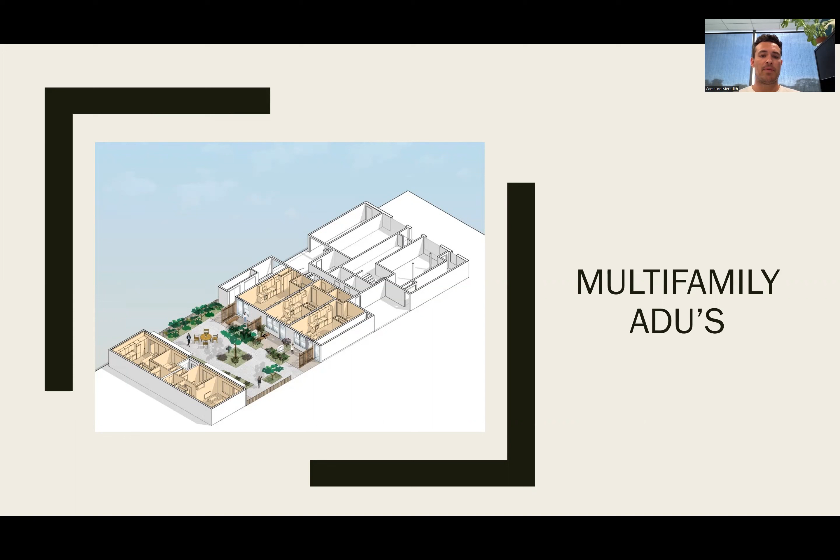Been getting a lot of requests lately about multifamily ADUs specifically, so I wanted to put a brief presentation together covering the main topics. Right now we're doing four multifamily projects: a couple are garage conversions, shown here in the slide, and the other two are freestanding ADUs we're building from scratch. We'll cover the main rules with multifamily, so let's get started.

Some of the 2020 state law changes specific to multifamily: there's no minimum lot size requirement, no floor area ratio requirement, multiple ADUs can be built on multifamily properties, limited parking requirements, and cities cannot override major state law changes, which is huge.

You can build up to 800 square feet each for freestanding units. Some cities allow 1,200, for example Long Beach. There's also the possibility to stack - rules may let you build two freestanding ADUs, and some cities will let you stack one on top of the other. Always check with your local city, because rules vary between cities.

The other method is you can build up to 25% of the existing unit count out of non-livable space. For example, if you have 4 units, you can build one ADU out of a garage, storage, or similar space. If you have 8 units, you can convert 2 ADUs out of that space. So 25% of the existing count - imagine a 100 unit building with extra garage space; you could potentially do up to 25 units out of non-livable space, if the property allows. There's a huge opportunity for that with multifamily.

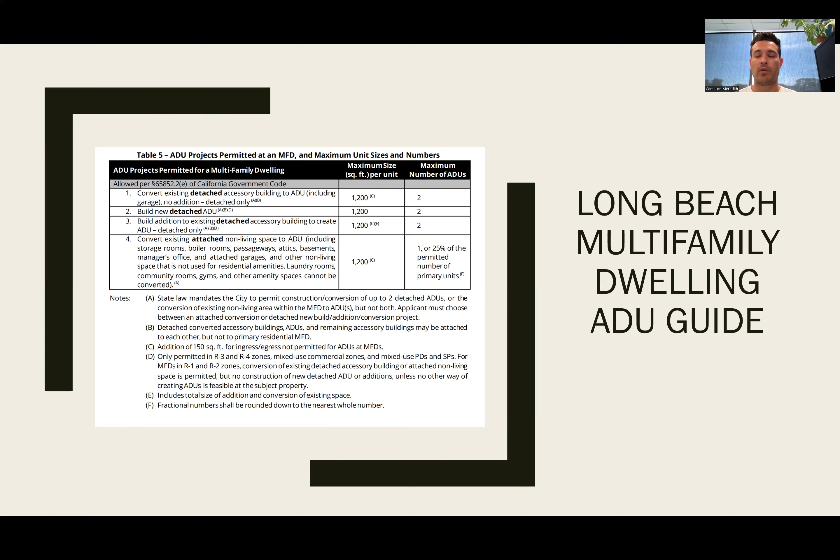But what they're saying is R3 and R4 has different rules than R1 and R2. So on an R2, they're going to make you go inside of non-livable space before they're going to let you build from the ground up. But that's only if there's no other option to do so. So very important to know that specifically about Long Beach. Again, always check with your local city of whatever city you're trying to build in.

Here's a Long Beach ADU guide continued. Again, this is specifically for multifamily. So you can see the setbacks for your side and rear. I'm not going to go through all of them since it would take a while, but this is pretty standard. Most setbacks are 4 feet from your side and rear and 10 feet from your existing structure. Some cities have moved that down to 6 feet from your existing structure.

But again, this is just to show you as a reference. Front yard, very important. Most don't let you do the front yard. You can kind of look at the rules here and what that consists of, but it's very rare that they let you go in the front unless there is enough space. And then height limits, you can see your height limits here.

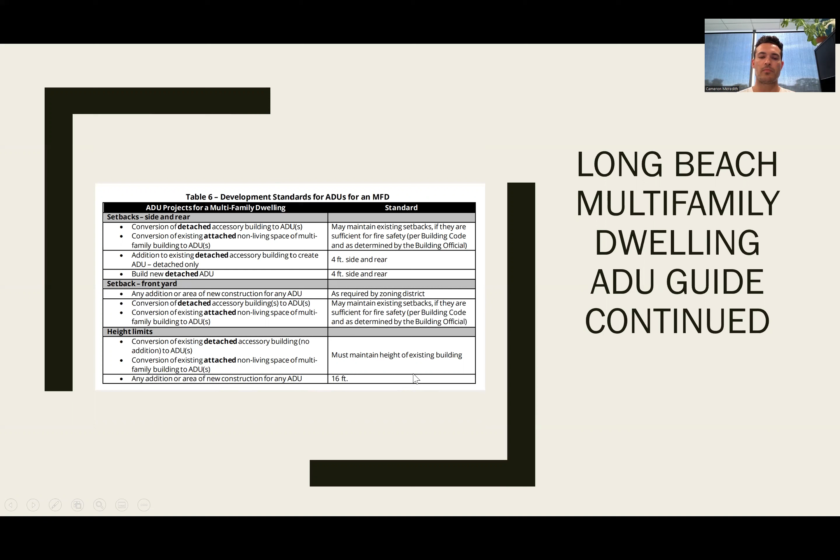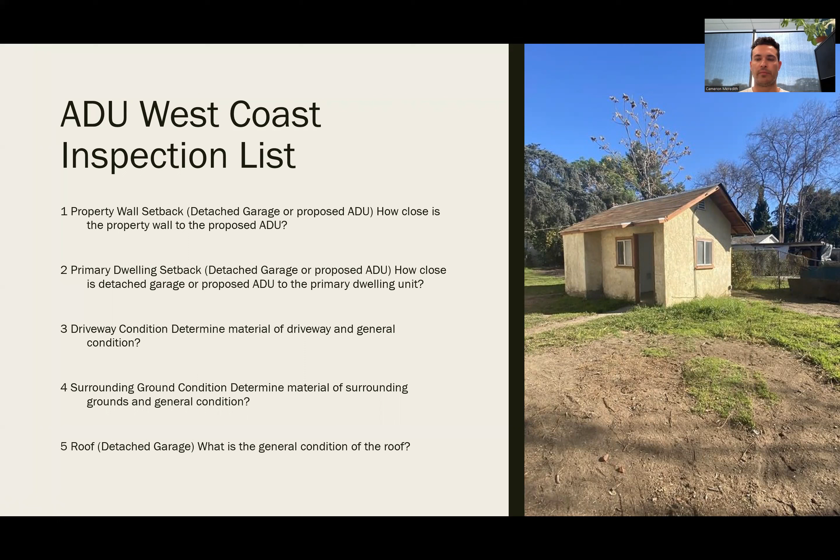If we're doing a detached garage or converting a garage, what type of condition is the roof in? Inside structure of the garage - again we need to note any serious termite or fire damage. Slab - how's the floor anchored to the garage wall? Make note of the condition of the slab.

Dimensions - we always want to measure dimensions of the backyard or garages. Sewer distance to primary residence or foundation type - again, sewer is going to be a big cost, so we want to see how far we're going to trench for that.

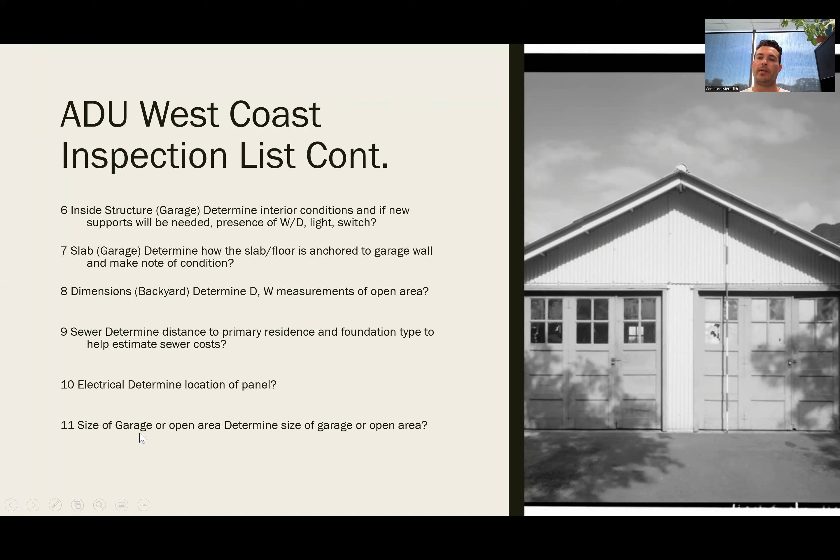Electrical - determine the location of the panel. Does that come in above or below? Where is it at, and how far do we have to trench? And then obviously the size of the garage or open area. Pretty self-explanatory, but hopefully that gives you an idea of what to look for.

Steps with building - let's say you're an operator for a multifamily building or an agent helping somebody analyze this. First thing we do is hop on the phone. Just like buying a property, we make sure people have proof of funds or a pre-approval letter before ever coming out and giving an actual real estimate.

Once we do that, we'll go to the site inspection, which usually takes about 40 minutes to an hour - I'd say about 40 minutes. We take pictures, notes, and measurements.

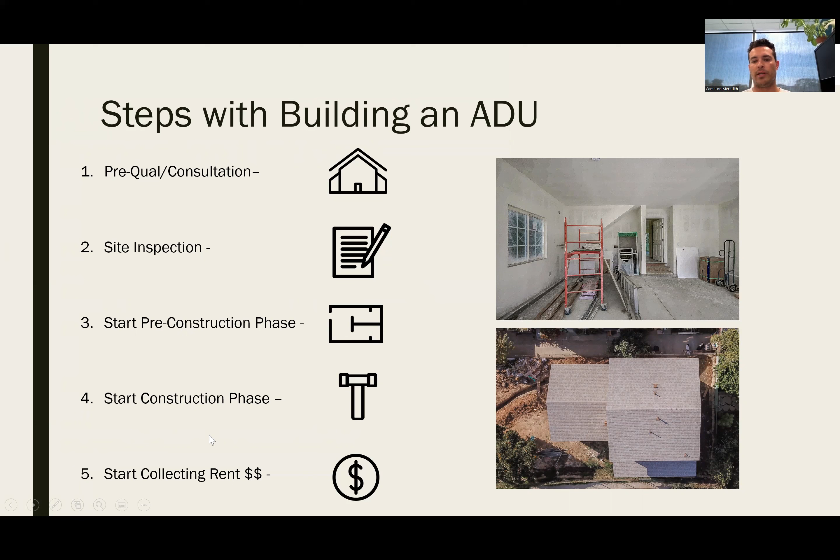From that point, if you decide to move forward, we'll start the pre-construction phase, which includes the design work as well as the engineering. I'll talk about timeline on the next slide. But once we get full approval from the city, we're allowed to start construction, which is the fourth phase. Then once it's all built and ready to rent out, you guys start collecting rent.

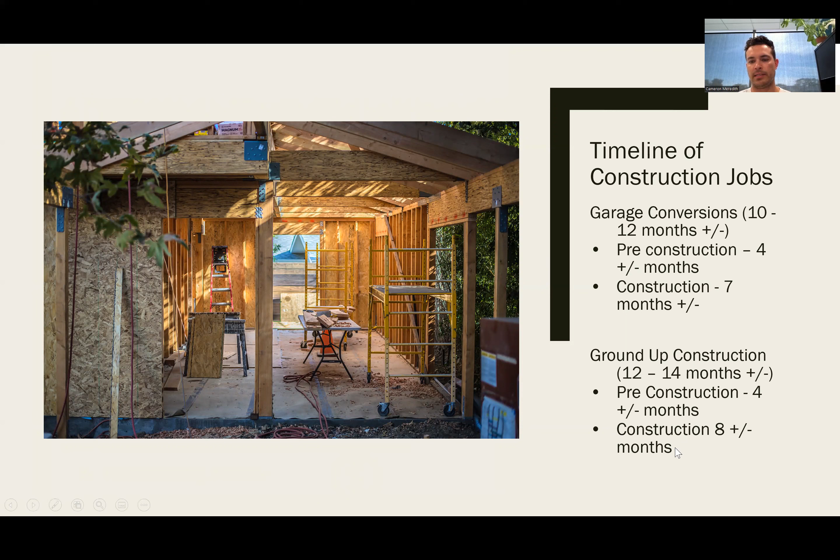Timeline again, this is just the cost that varies between jobs and what we're building, but just an average number. Garage conversion is about 10 to 12 months: pre-construction is about 4 plus or minus months, and construction is about 7. Ground up construction, you're probably looking at 12 to 14 months, 4 to 5 months plus or minus in the city, and construction is about 8 plus or minus months.

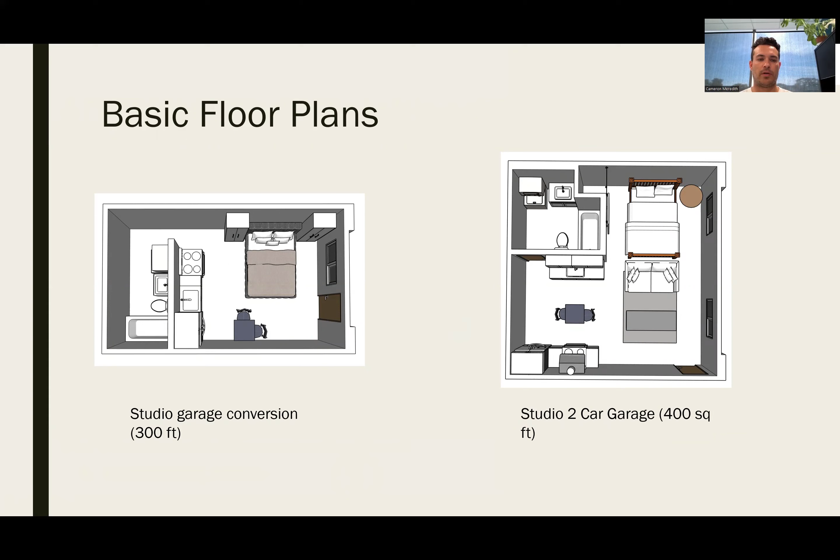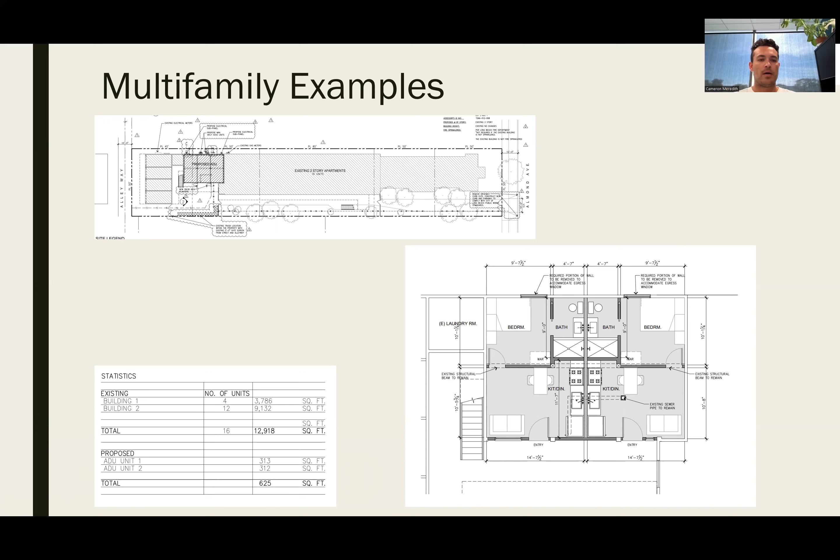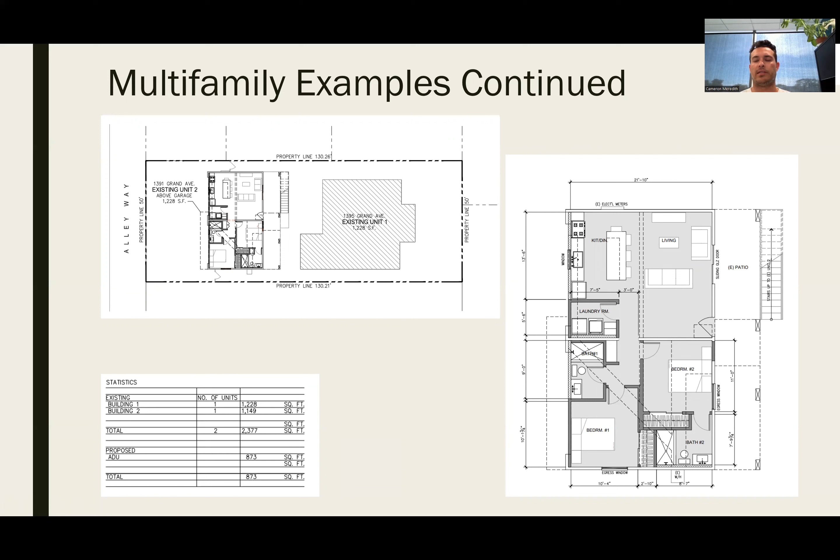Again, these are projects we're just starting right now as far as construction. We've already passed through the city, but this is current examples of what we're doing with some multifamily stuff right now.

Next page is financing options. This is a big question we get. I'll go through some of the main ones we see. Obviously the rates went up, so people are starting to look for different financing options that are possibly available. For the most part what we've seen is cash out refinance, HELOC which is common, and certain renovation loans are available. I'm not too familiar on current rates and how those break down, but you can get some.